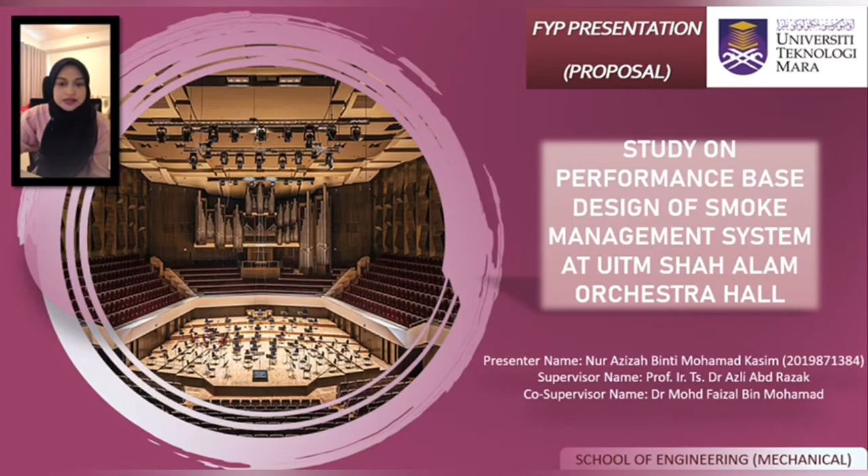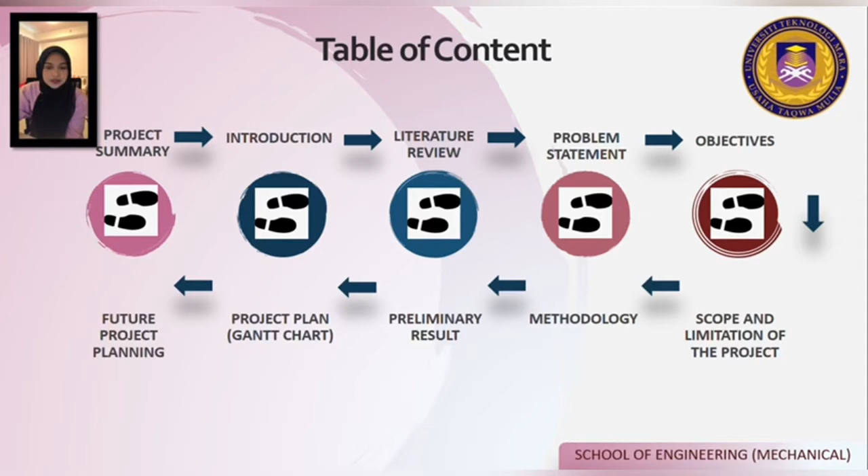SHAH Orchestra Hall. The contents of this presentation are project summary, introduction, literature review, problem statement, objective, scope and limitation of the project, methodology, preliminary results, project plan, which is my Gantt chart, and also future project planning on FYP 2. First is project summary, which is the synopsis of this project. A project study on performance-based design of smoke management system at UiTM Shah Alam Orchestra Hall.

This is the picture of the Bahagian Arkib dan Muzium, which is on renovation to make an orchestra hall of the UiTM Shah Alam. My study will be focused on the smoke and heat contained in the hall during fire burning by carrying out research on the smoke ventilation system installed to direct the smoke and hot air out of the building with presence of makeup air. The research is carried out in simulation to observe whether the smoke ventilation system will result in the right air change and airflow, with the main adjusted variable of fire source location.

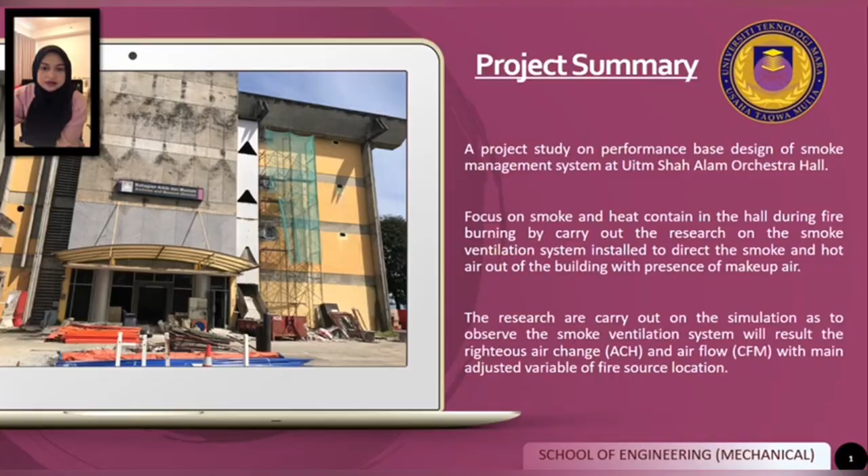Next is introduction. What can be defined as a fire outbreak? It is a disaster caused by many factors which only requires fuel, oxygen and heat to burn. These three are also called the fire triangle, also known as fire diamond. How to manage the fire outbreak in a building? It is by installing the smoke control system. Smoke control system is one of the fire prevention measures for buildings such as hospitals, schools, and hotels. Smoke control systems or smoke management systems are mechanical systems that control the movement of smoke during a fire. The most common system in a building is the atrium smoke exhaust system.

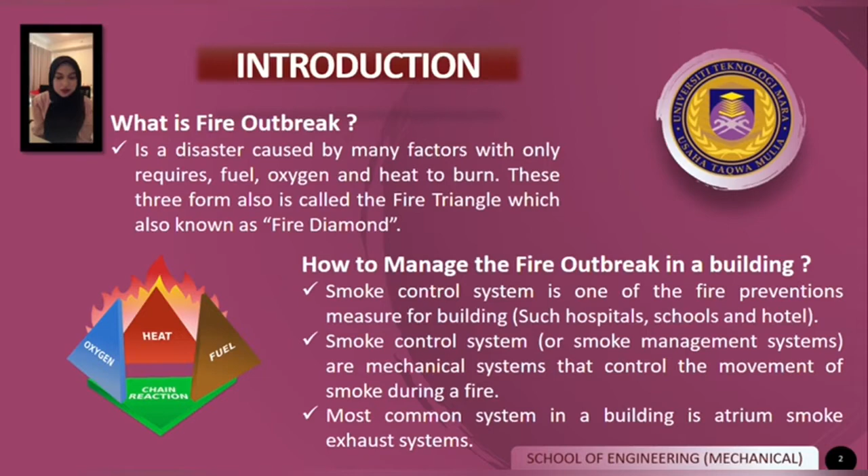Why do buildings need a smoke management system? First, Malaysia has an established building code, namely Uniform Building Bylaw 1984, also called UBBL 1984. If we comply with this code, the building should be able to evacuate the occupants safely during fire burning. UBBL is enforced by the local authorities and provides the minimum requirements under the Street, Drainage and Building Act 1974.

Second, fire safety protection system includes passive and active systems. Active and passive fire safety measures are both important: passive fire safety is required in light fire outbreaks, while active fire safety is important in huge fire outbreaks. One example of fire safety is smoke exhaust as a smoke management system in the building. Next, smoke contains various toxic gases which can cause inhalation injury to people. Why is this smoke dangerous? The smoke itself contains toxic gases such as carbon monoxide (CO), carbon dioxide (CO2), and many other toxic gases which can cause inhalation injury and sudden death to the inhaler.

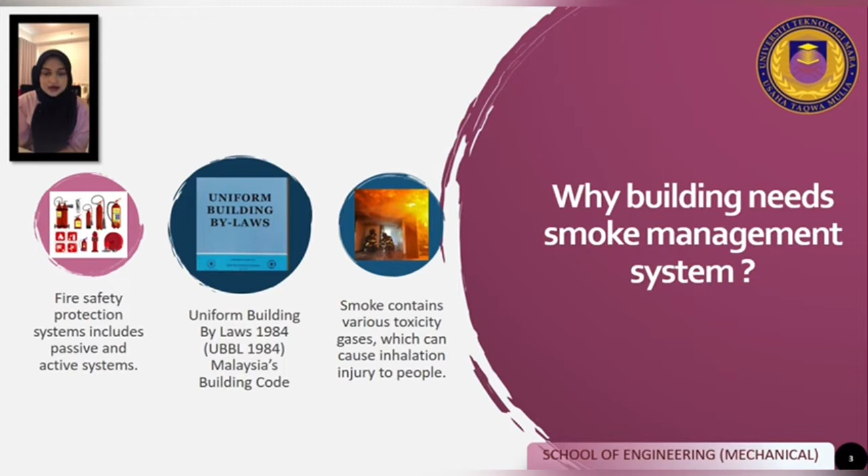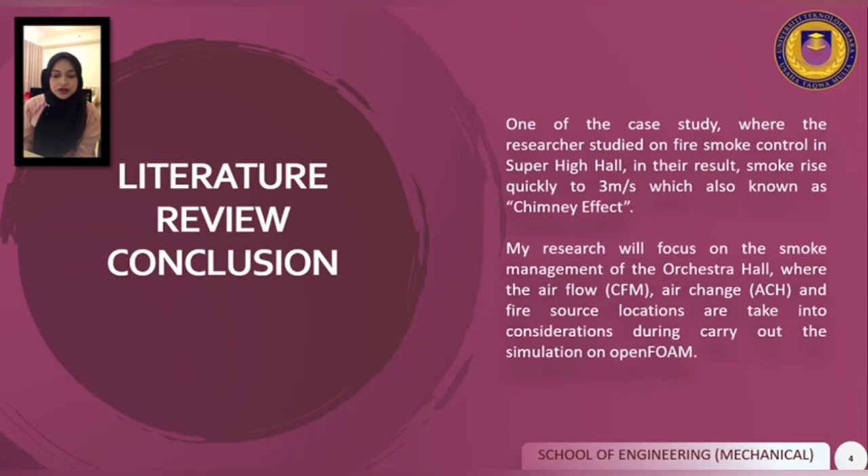Literature review conclusions. There are several researchers that have done studies regarding the smoke management system. In one case study, the researchers studied fire smoke control in super high halls. In their result, smoke rises quickly at 3 meters per second, which is also known as the chimney effect. The smoke during fire can only rise to a certain height based on the fire power. When the fire power is small, the thermal buoyancy will be smaller. My research will focus on the smoke management of the orchestra hall, where the airflow (CFM), air change (ACH), and fire source locations are taken into consideration while carrying out the simulation in OpenFOAM software.

Problem statement of the project. A suitable exhaust fan is needed to extract smoke out of the building during the fire outbreak. The suitable exhaust fan will reduce the cost, besides functioning with the desired airflow CFM and air change ACH for proper smoke evacuation. In addition, 2 openings of fresh air intake are available at both sides of the orchestra hall to provide adequate oxygen for hall occupants during fire burning and push the hot air up to the upper surface of the building. Hence, it is easier for the exhaust fan to remove the hot air and smoke out of the space.

The 2 openings may worsen the fire outbreak by providing more oxygen. Thus, all these variables are taken into consideration while carrying out the simulation, with various locations of fire ignition in the hall as manipulated variables. The simulation takes place in OpenFOAM software to study the smoke management of the hall during combustion, to ensure all variables above satisfy the requirements of the hall, improve the indoor air quality and save the occupants from smoke inhalation when a fire occurs.

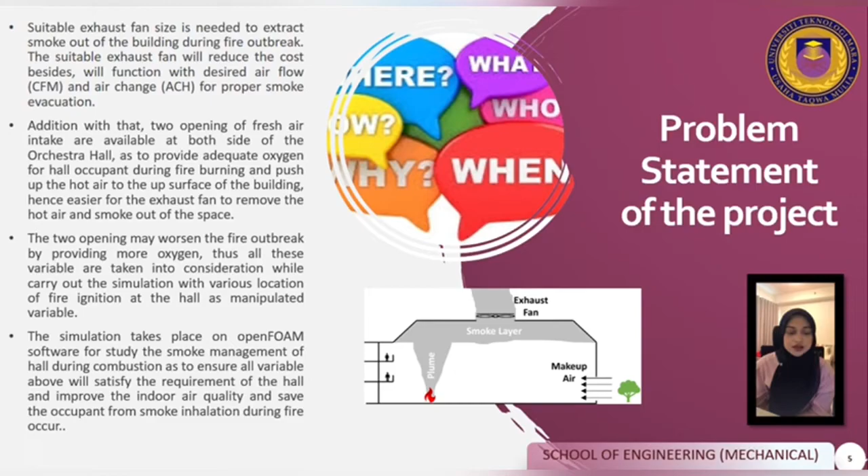To understand and plan what to achieve by the end of this project, objectives are needed. The objectives of this project are, first, to observe the smoke management system when different locations of the fire source and different airflow are used. Second, to determine the suitable airflow and air ventilation to extract smoke and heat out of the orchestra hall efficiently.

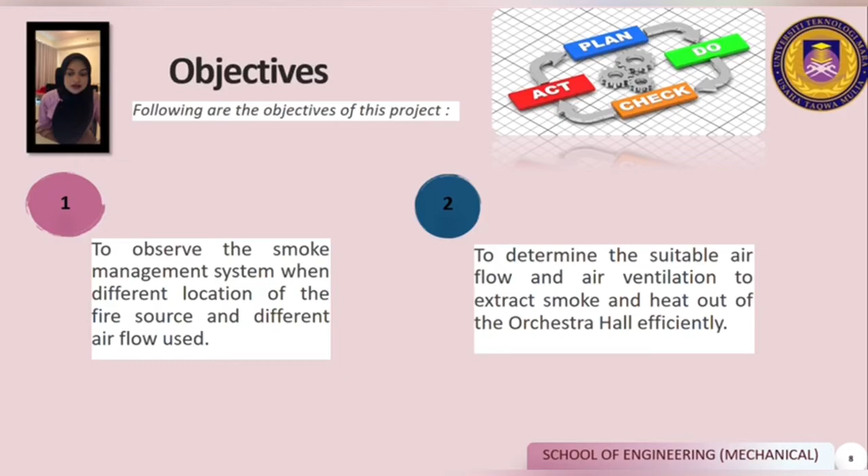Scope and limitation of the project. The overall stage, audience seats and interior space of the orchestra hall is the actual place to carry out the simulations. The dimension is based on the actual design, and a few samples will be tested by manipulating the variables in the simulations. Third, there are 3 variables, which are the opening of fresh air intake for both sides of the building, the exhaust air grill and the location of the fire source.

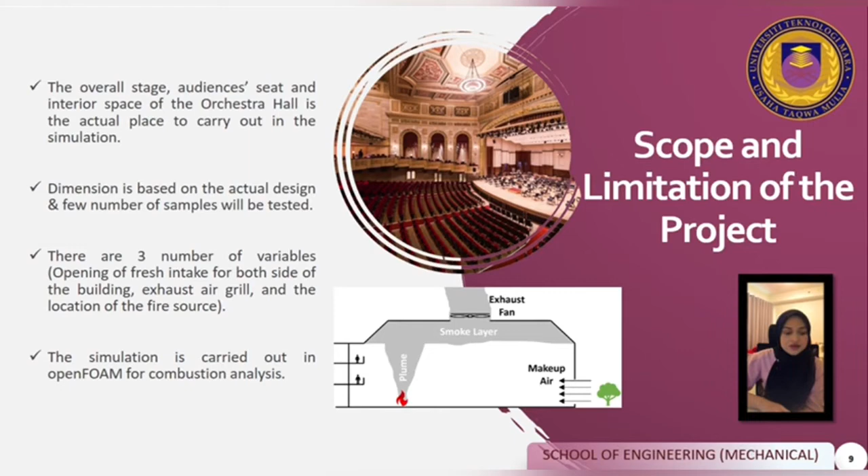Fourth, the simulation is carried out in OpenFOAM for combustion analysis; the OpenFOAM software is downloaded at openfoam.com for Windows 10. Methodology. The simulation analysis flow contains 3 phases, which are Phase 1 design, Phase 2 block mesh and Phase 3 product. For Phase 1 design, the dimensioning design of the orchestra hall is based on the original dimension in CATIA software. The whole space is drawn in simplest form for smooth simulation on OpenFOAM.

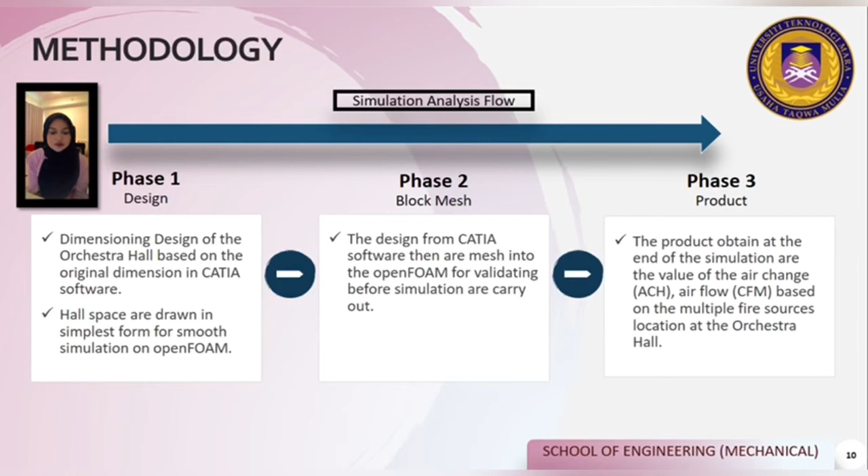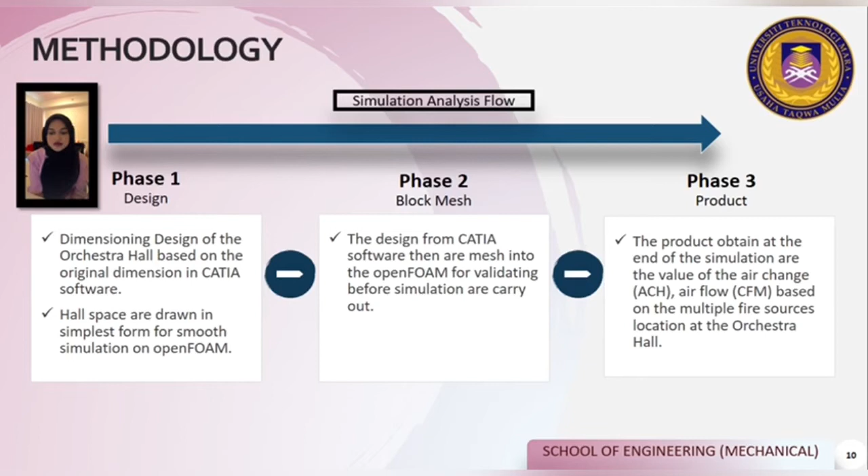Phase 2, block mesh. The design from CATIA software is then meshed in OpenFOAM for validating before the simulation is carried out. The block meshing is carried out for the same design that has been drawn in CATIA software before, so as to keep the original dimension during the simulation. Phase 3, product. The product obtained at the end of the simulation is the value of the air change, ACH, and airflow, CFM, based on the multiple fire source locations in the orchestra hall.

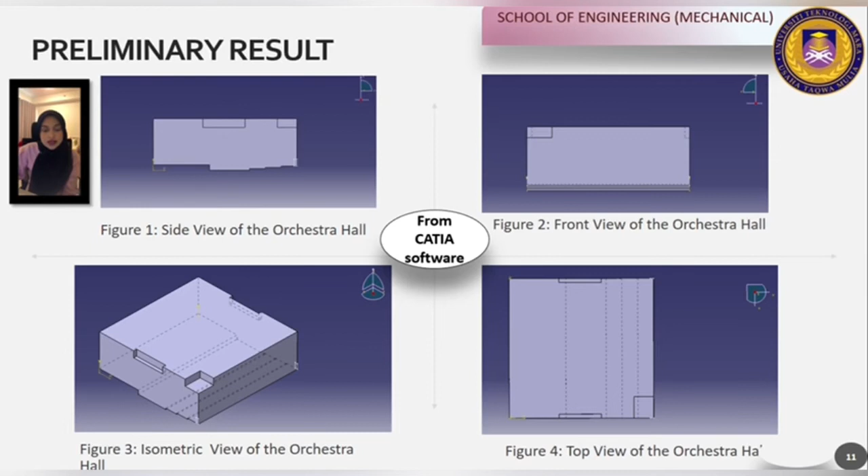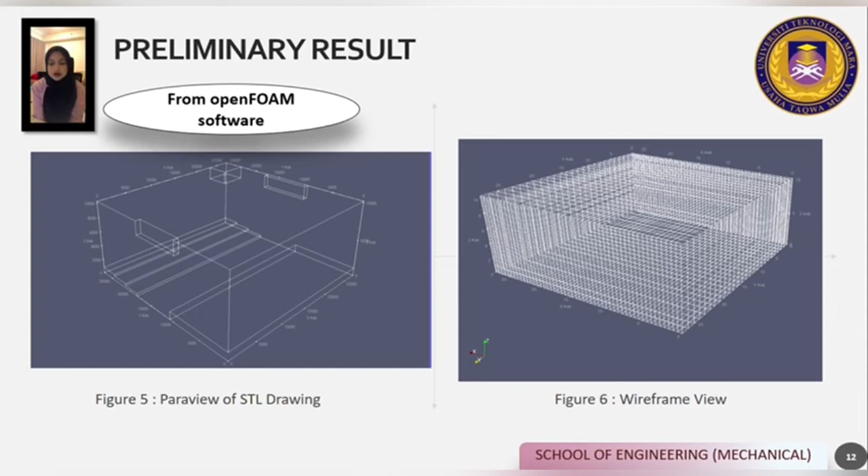These are the preliminary results from the OpenFOAM software, as the panel can see: figure 5, the ParaView of the STL drawing of the orchestra hall, and figure 6, the wireframe view of the orchestra hall in OpenFOAM software. Block mesh in OpenFOAM. The block mesh process is carried out to check the simulation domain and simulation setup before carrying out the analysis of the combustion in OpenFOAM. To obtain the preliminary result of this project, there are a few procedures to be followed.

First, the drawing from CATIA must be in IGS format, as this IGS format is used for OpenFOAM to read to carry out the mesh. Second, the IGS file is opened in ParaView to see whether the dimensions entered can be used or not. This is because OpenFOAM can only read dimensions in meters. Third, the mesh from the closed region in the wireframe view can be combined with the ParaView STL drawing but needs high graphics for the combination.

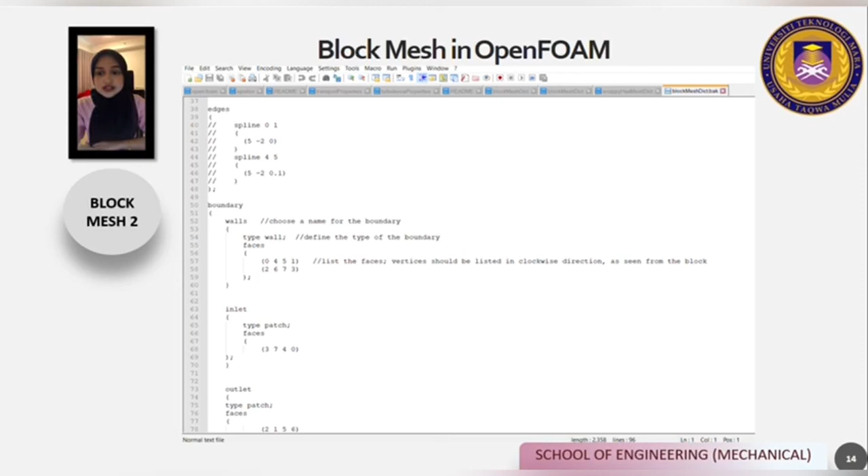Fourth, the ParaView coding from the tutorial shows that the dimension from the STL drawing needs to be the same to generate the drawing in OpenFOAM. Then it can be analyzed in ParaView. ParaView can be defined as software to read the files from OpenFOAM, and OpenFOAM uses a terminal with a C++ program.